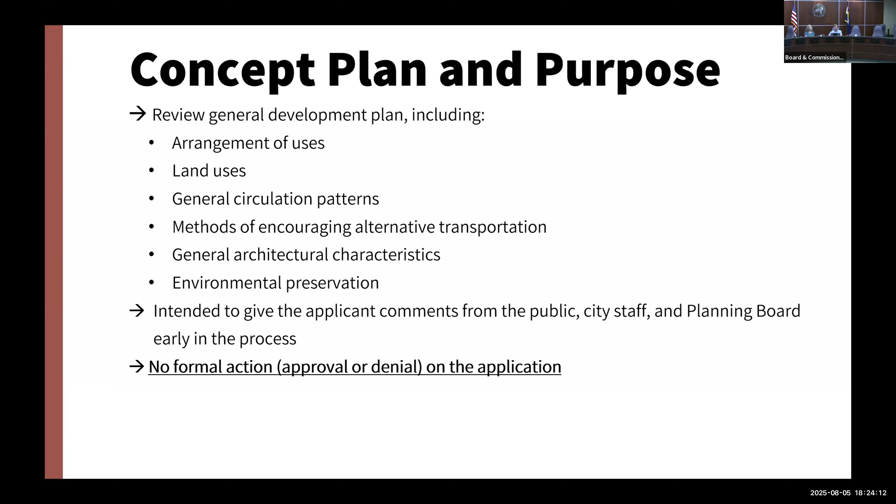Good evening, everyone. My name is Allison Blaine, and I am the case manager presenting this next item. In this presentation, I will briefly cover the information that was provided in staff's memo, including the purpose and process of concept plan, the project proposal and background, and some key issues for discussion. The purpose of concept plan is to review a general development plan for a specific site and help identify key issues in advance of any site review submittal. The applicant will receive comments from the board, staff, and public, and as a reminder, no formal action will be taken tonight. The applicant completed the necessary public notice requirements per the code. Written notice was sent to property owners within 600 feet and a sign was placed on the property as well. Staff received comments from 3 neighbors, which have been included in the memo packet.

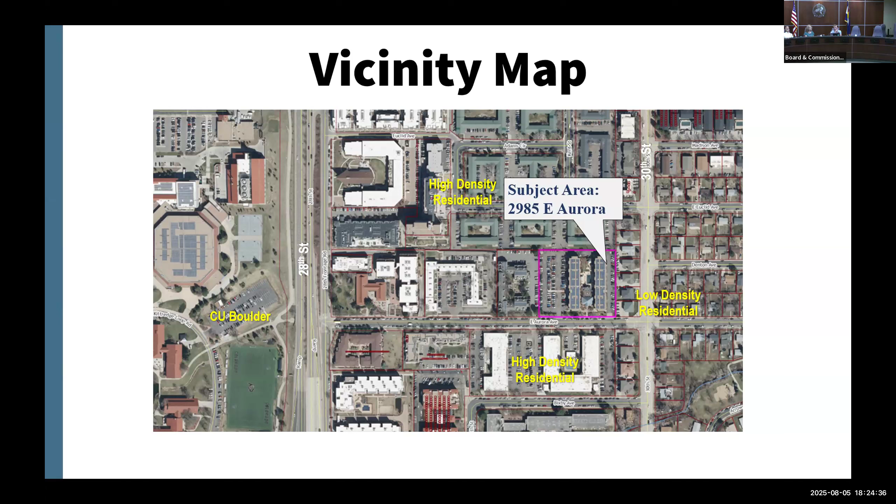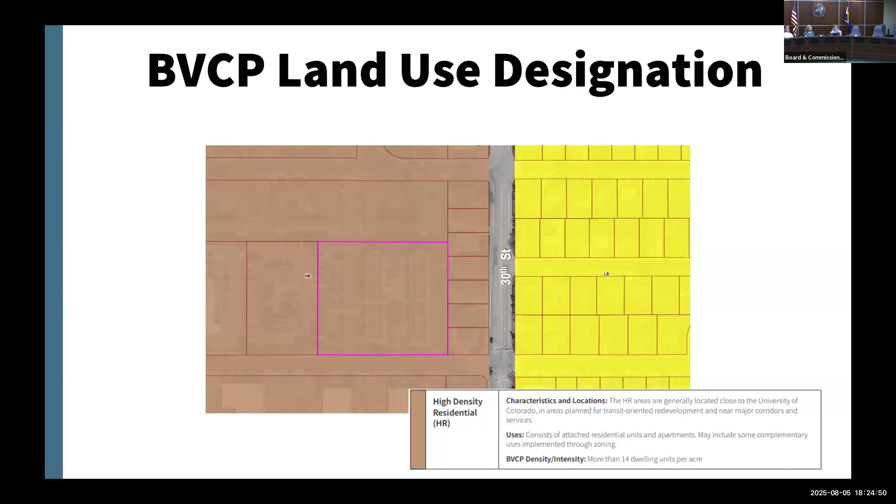The subject site is located east of CU Boulder between 28th Street and 30th Street along East Aurora Ave. The land use designation for the site is HR, or high density residential. These uses consist of attached residential units and apartments and may include some complementary land uses. The anticipated density is more than 14 dwelling units per acre. The subject site is zoned RH5 and surrounded by RH5 zones on all sides. East of 30th Street, the zoning transitions to RL1. Intensity standards for the zone are based on the combination of the following: an FAR limitation of up to 1.5, the provision of a minimum of 15% of usable open space, and the application of height and setback standards. Per Table 7.1 of the Land Use Code, buildings are limited to a max height of 35 feet by right in the RH5 zone.

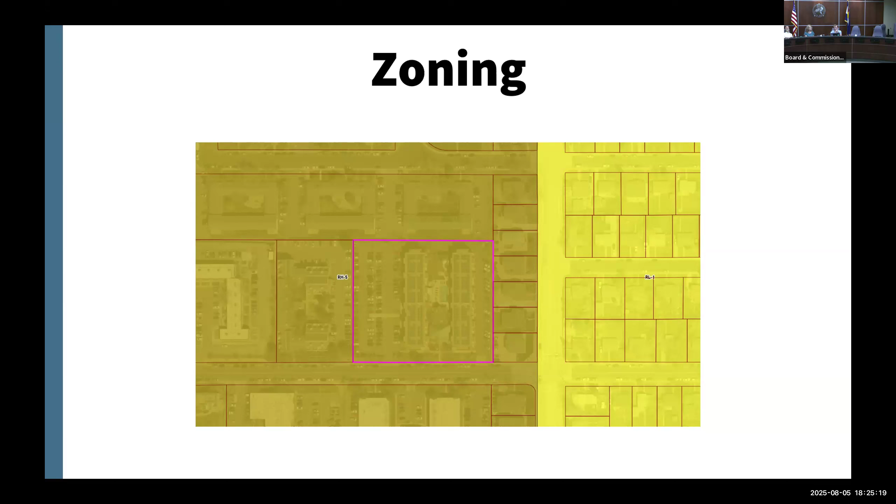The area is predominantly residential, and the uses immediately surrounding the subject site are high-density residential, with the university campus to the west and lower-density residential to the east. Commercial uses are located south along Baseline Road and north along Arapahoe Ave.

There's a variety of building forms and heights in the area. For instance, the existing Sterling Apartments on site is 4 stories, and 2-story quadplexes and triplexes are located east of the subject site along 30th Street. Development closer to 28th Street, such as the Spanish Towers and Golden West, are over 5 stories. Building forms scale down mostly to single story to the east of 30th Street.

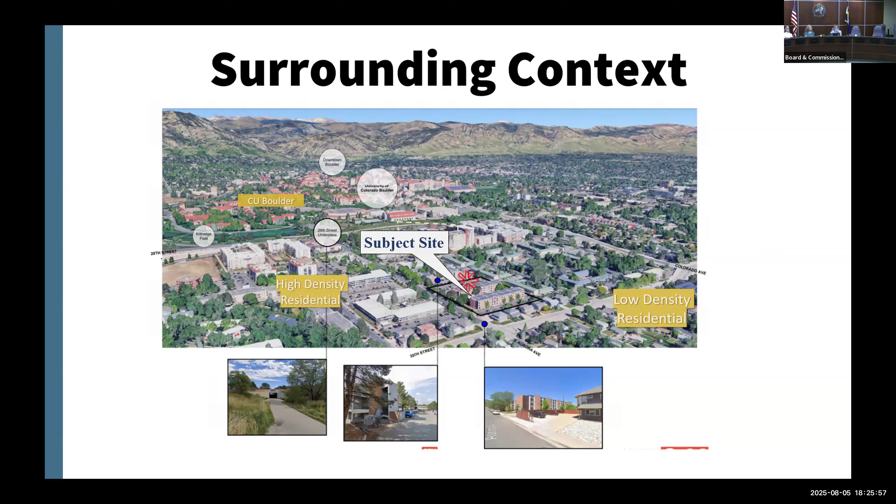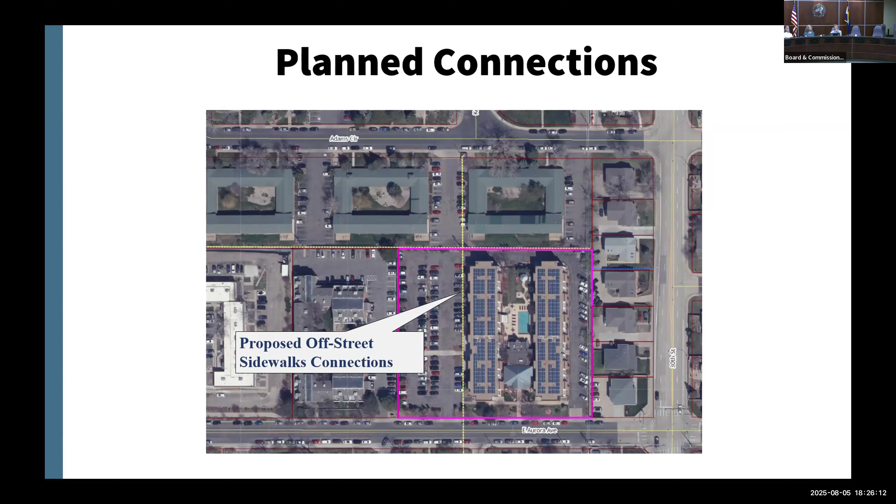The city's transportation master plan shows a sidewalk connection along the northern property running east-west, as well as bisecting through the site running north-south. Construction of the sidewalk will be required and should be shown on all plans and documents as part of a future submittal. The site is already developed with attached residential for the Sterling Apartments, a surface parking lot, and some vegetation and landscaping along the edges of the property.

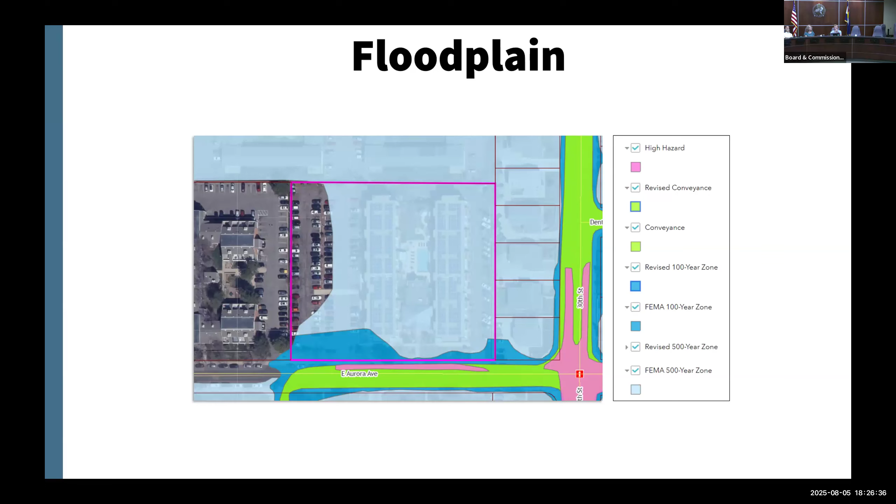The site is near Skunk Creek and is therefore impacted by the 500-year and 100-year flood zone. Proposed redevelopment of the site will require floodplain permitting and additional design considerations. And that brings us to the proposed project for tonight. The applicant is proposing to subdivide the existing site and redevelop the western portion, currently a surface parking lot, with a new residential building containing 36 dwelling units and up to 55 feet in height.

Parking is proposed to be located in a below-grade garage, as well as some surface parking east of the new building. As submitted as part of this concept plan, a majority of the open space will be provided in the form of private balconies and rooftop decks. A cafe/amenity space is shown on the ground floor along Aurora Ave, and the roof heights vary from 2 to 5 stories. The design also incorporates facade recessions and projections in the form of bays of different materials. Simple details include awnings, parapet caps, and brick detailing, and the facades provide a repeating stoop element.

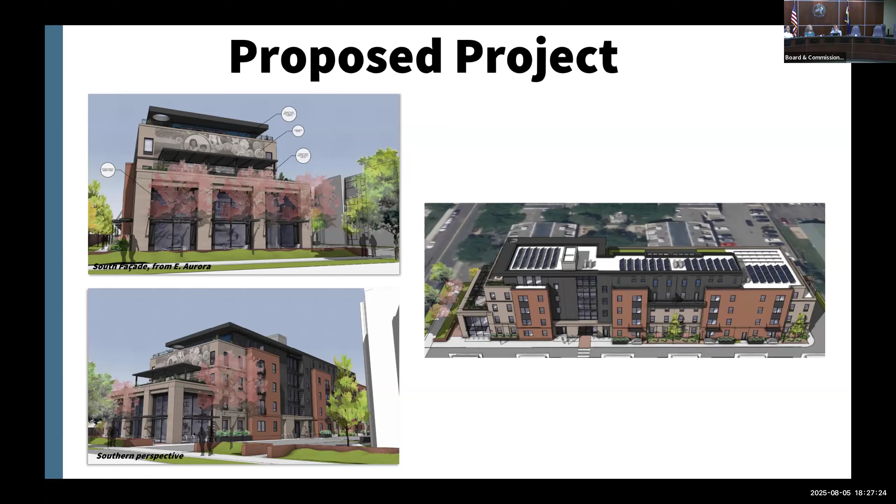Staff has identified 2 key issues for discussion, and I'll detail these in the next slides. Key issue 1: is the proposal consistent with policies of the BVCP? Staff finds that overall the proposed use and design for the site aligns with key BVCP policies and the land use designation for the area by providing housing in an area that is active, near transit, and close to CU Boulder. Key issue 2: does the Planning Board have feedback on the conceptual site plan and building design?

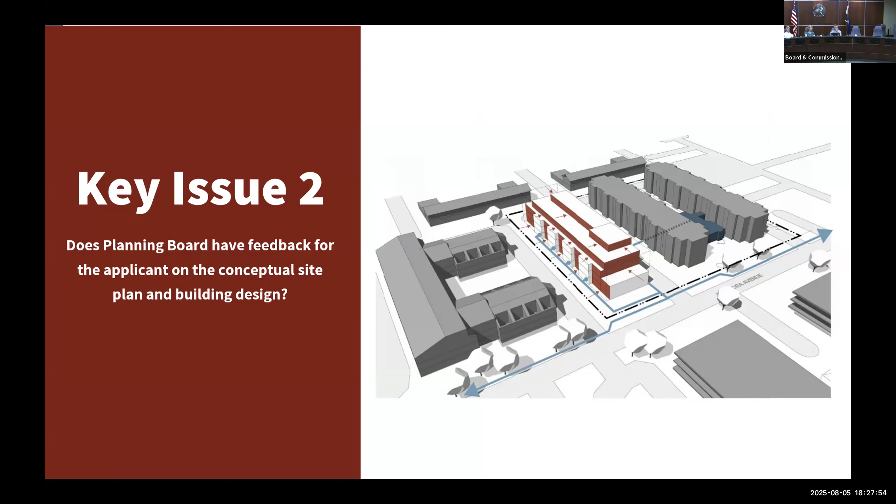Overall, staff supports the general design, including the building form and site layout, and finds it generally consistent with several site review criteria. For instance, the larger floor plate building incorporates varying roof heights and forms to provide relief to the proposed height and mass, consistent with criteria. Facade projections and recessions add additional variety to building form, and design elements like high levels of transparency along the southern elevation create an anchor to the building form as well as a vibrant pedestrian experience. Staff supports the inclusion of simple detailing, material assignment to building forms, and lack of in-plane material changes.

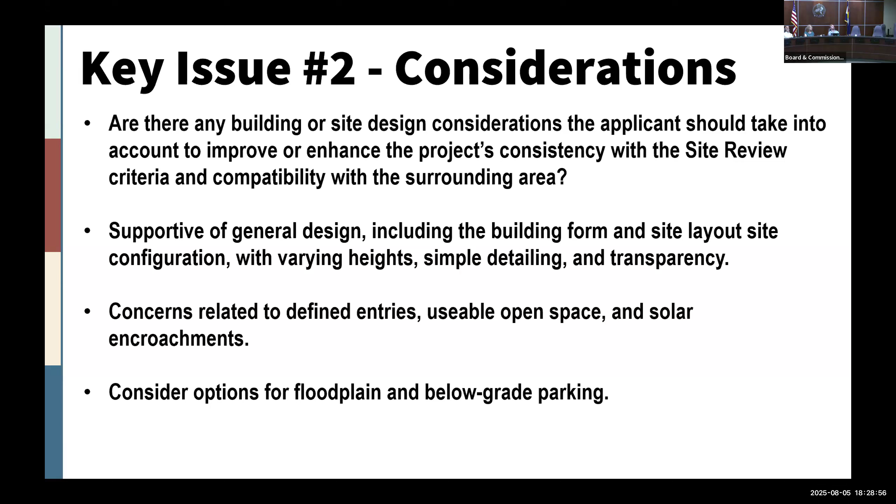There are some specific concerns about usable open space for the site, which is predominantly private balconies and roof decks, as there's limited ground floor public gathering areas. Additionally, a defined entry should be included along the southern elevation to align with criteria, and staff recommends the applicant better review the design as it relates to solar encroachments on adjacent properties. And then last, the applicant will need to consider some design options for the below-grade garage, which is currently not allowed in the flood zone as proposed.

For next steps, following the concept review hearing, City Council can vote to call up the item to provide additional feedback. After that, the applicant will then either proceed with submitting development review applications or can submit a second concept review application. As currently proposed, a site review application will require a decision by Planning Board, subject to call up by City Council due to the proposed height. And I will now open it up to questions.

Thank you so much, Allison. Always a very informative presentation and speedily done, which we appreciate. Thank you. Okay, questions from the board for Allison. Kurt.

Thank you. Yeah, I have a couple questions to start off. One is follow up really on the question that Laura asked by email about the flood plain, flood development, and particularly with respect to the garage. In your presentation, you said something about evaluate options or something like that. Can you elaborate a little more on what options are available other than not doing that?

Yeah, one of the options as it's described in, I believe, I don't know the exact code reference, but if they were to change the uses and include some commercial or mixed use, I think it's up to 25%, then the garage may remain. And the applicant's also here who can answer the same question when they present. Okay, that's interesting. Good to know.

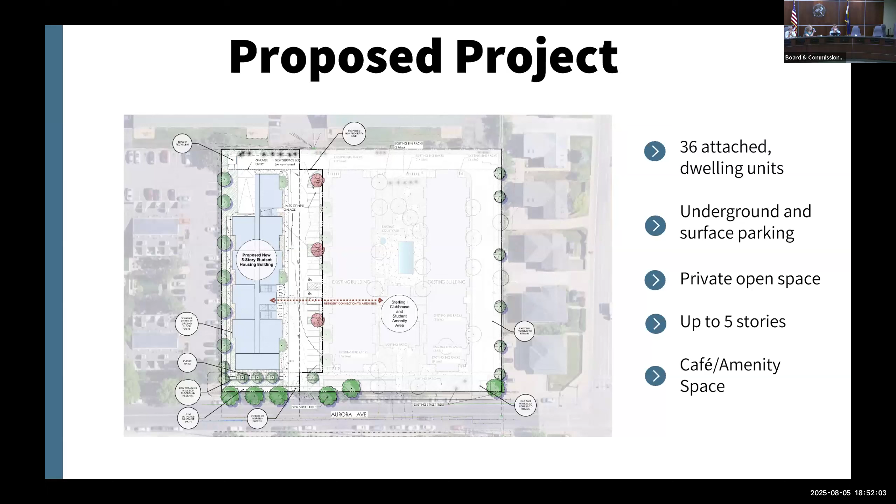We have base flood elevations that are specified in our code, but the overarching policy of why residential and mixed use are treated differently, I think Don can explain. Okay. It is also in the code, but it sounds like that really comes from the FEMA rules. Right. Okay, got it. Thanks.

Any last questions from the board for staff before we go to the applicant presentation, and then our public hearing after the board asks questions of the applicant? Okay, seeing none, we will go to our applicant presentation. And I believe the applicant will have 15 minutes, if we can put that up on the clock for them.

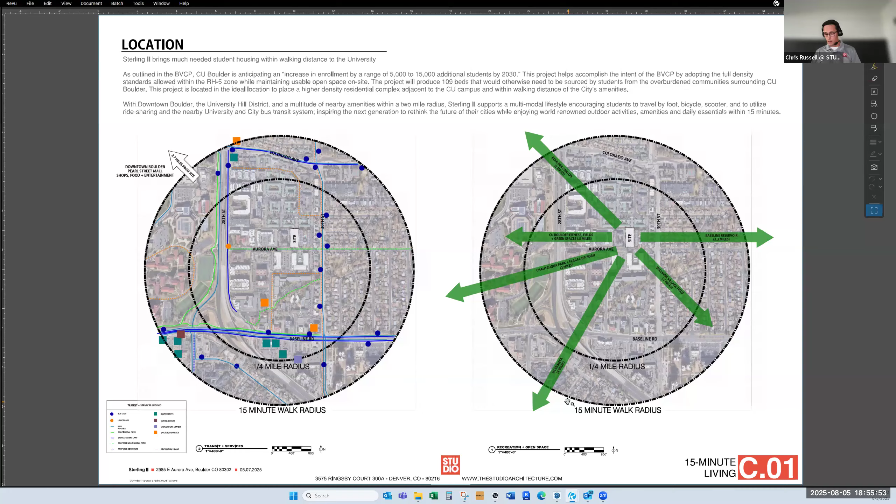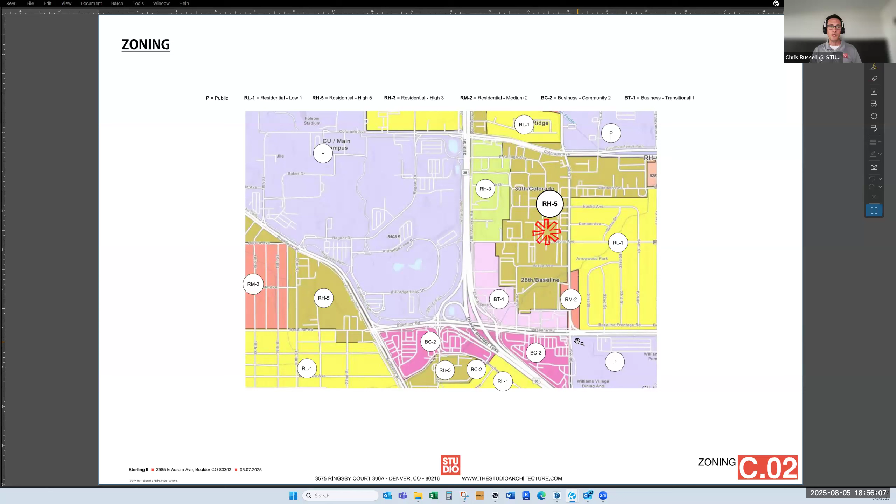Student housing, we feel, is the best use for this site, as it supports the purpose of the RH-5 zone that it's smack dab in the middle of, and the vision of the university subcommunity, which is to support growth of the university by 2030. Again, Allison already showed this, but RH-5, just east of the university and Highway 36. Allison talked about the goal for RH-5 to support that density for more residential units.

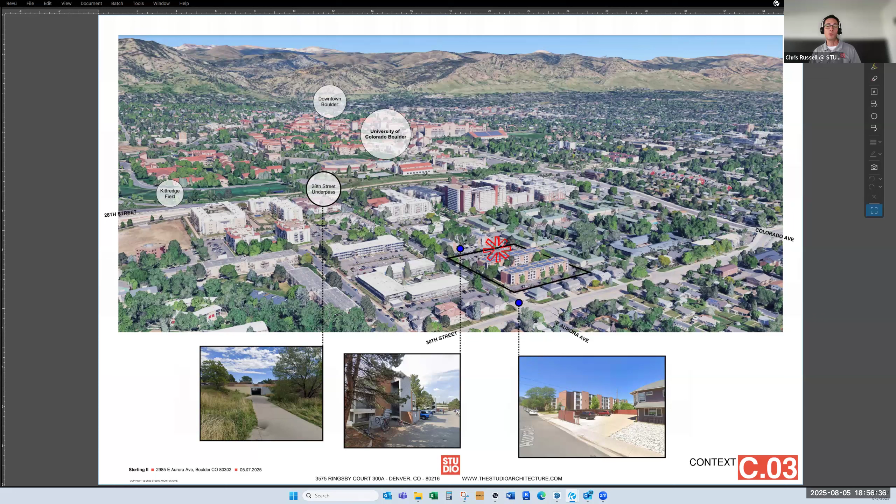This is a good aerial, I think, that shows the surroundings of the site. There's 2, 3, 4, 5, and even a 10-plus story building to the west. So we're proposing to take advantage of the allowable modification in the code to elevate the building to 5 stories and a maximum of 55 feet. It feels appropriate in this location in order to provide some much needed housing. So what are we proposing to do? Diagram 1, like I said before, initially subdivide this site into 2 separate sites.

They're both going to be compliant lots, one serving the existing Sterling apartments and one serving our proposed new construction. We're going to relocate the 100-year floodplain closer to the south property line. And both of these, as Allison noted, will happen concurrent with the land use review application.

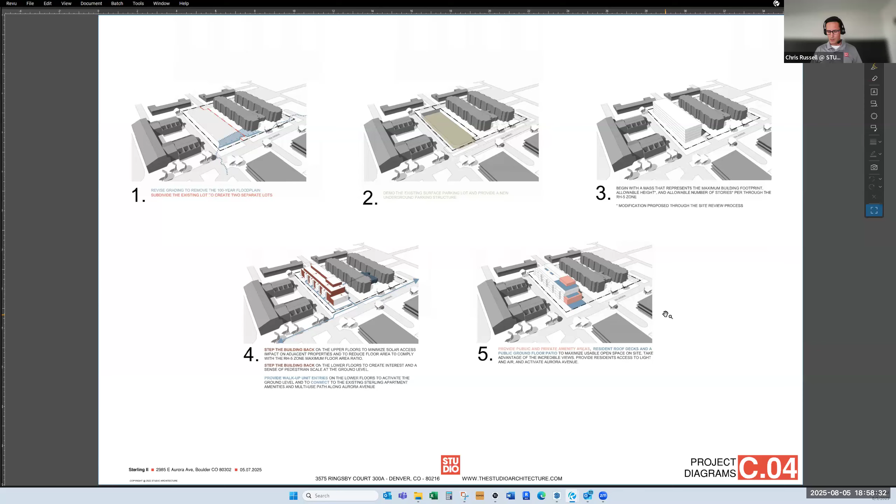Major moves here. This is probably where the bulk of our questions will be asked and answered. So the major moves of the project as it regards circulation and the location of the mass and the program. First, the surface of the new lot is split essentially in half, with the east half for vehicular circulation and surface parking, and the west half for the building and open space. The below grade parking would bridge the two and span from the east to the west property line.

On the surface, on the east half, the two-way access off Aurora Ave is maintained and accesses the 21 new surface parking spaces there on the east property line, and then continues north and accesses the parking garage and trash enclosure on the northwest corner. I know there was a question about how the parking garage is accessed. So you'd access it kind of in a counterclockwise fashion around the back of the building there.

The one-way circulation going clockwise around the existing buildings would be maintained. And then on that east side, there are actually 25 existing spaces that would remain. And all of this parking on the existing site and the new site would be available for all tenants of Sterling 1 and what we're calling Sterling 2. So there would be a shared parking agreement there.

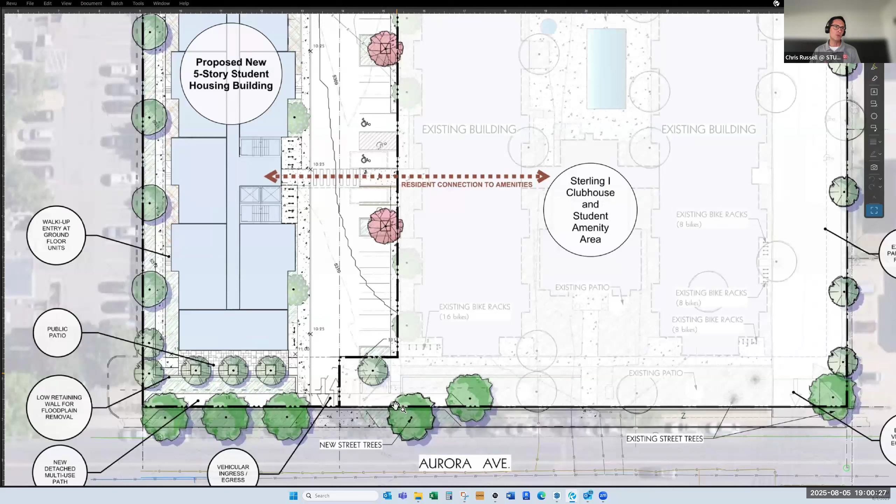The pedestrian circulation, we talked a little bit about this. Along the south side, it would be improved. We'd provide a new detached walk there, connecting east to west along the south side. And then the north-south connection that isn't quite highlighted, and I don't know if you can see my mouse, but I'll try and zoom in here, but there is one provided going north-south. That supports the vision of the transportation master plan there that would connect to one running east and west.

And got some follow-up questions for staff about what that looks like and how to implement that east-west sidewalk and how the properties share that. Let's see. The other thing to note here is that a strong and direct connection would be provided for the residents of the existing building and the new building, again, to share those amenities. I know you guys had a question about that.

It's not just the landscape and open space on this side, but the advantage of the same owners for each parcel would be that they can access this quite generous pool deck, fitness area, outdoor pool; it's quite a generous amenity space here on the existing site. There is a door that's not shown here, but it's shown on the very tiny first floor plan on the next slide, that would access this retail space. I know it's not the main tenant or resident access, but there is a main public entrance just about centered on this retail space.

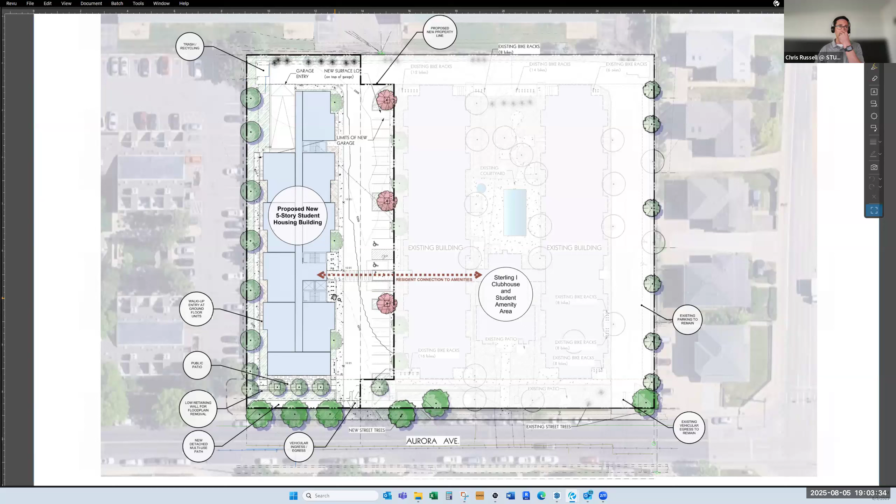So going right to left will kind of take us out of the ground first. Below grade, here is the access to the parking structure. And as Allison noted, there is a conflict here. I'm still not sure if you can see my mouse, but I'm trying to trace where the existing floodplain is. So one of the options is just to essentially shorten this parking garage and lose about 18 spaces there and try and recover those elsewhere. But that's one of the options we're looking at.

But also in the parking garage is the long-term bike parking area. Again, we're going to propose to go well above and beyond the code required long-term bike parking for this project. And also there's a spot here for additional tenant storage in the form of 3x4, 3x3 lockers there. On the ground floor, we talked a little bit about this. It contains mostly residential units with an amenity space on the south side. And then you can really start to see how large that public patio is on the south side.

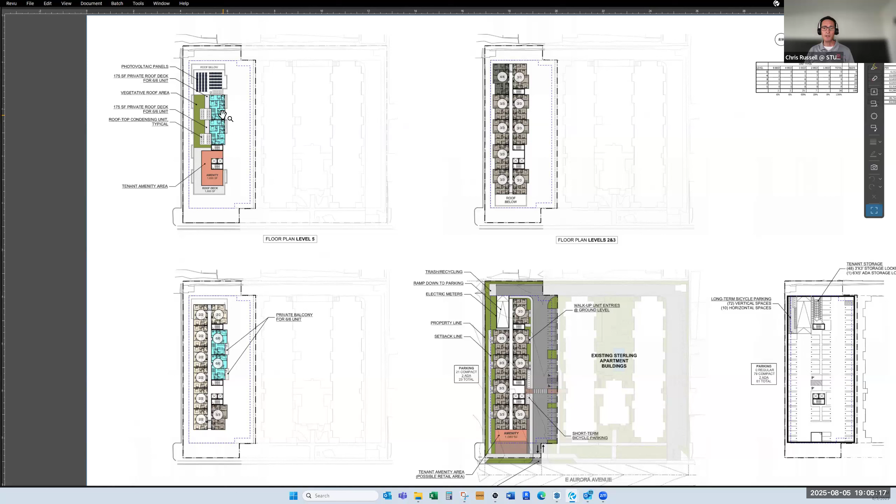Upper floors, I'll zoom around a little bit, contain residential units, private balconies for the 6-bedroom units that you can see here. And we can see those on the elevations in just a moment. Roof decks for resident enjoyment, and a large amenity space on the 5th floor here on the south side with incredible views of the Front Range, as you can imagine. On the roof, we're stepping back the massing significantly and proposing a lot of usable roof deck area, a vegetative roof area, and the remainder would be clear area for a future PV system.

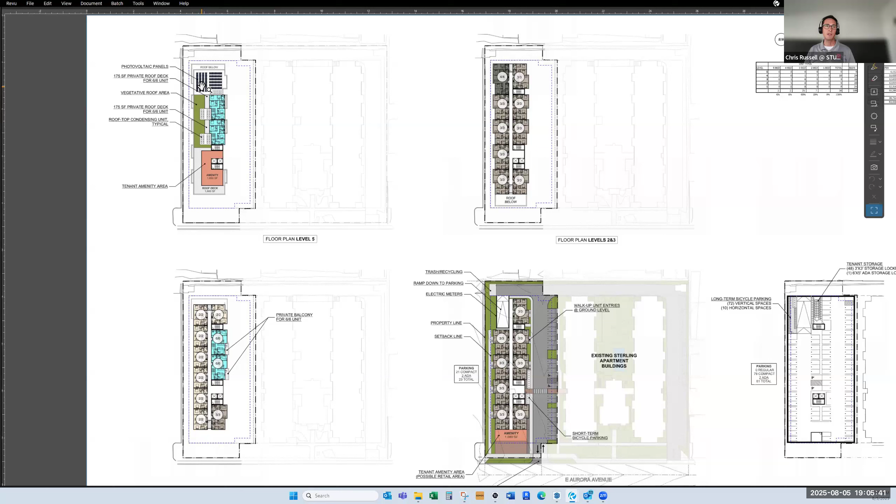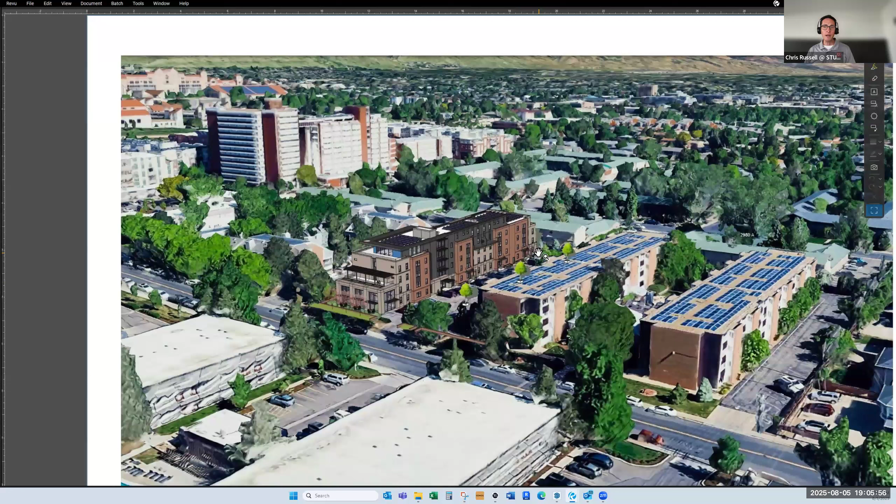I know I'm running short on time here, so I'll try and go quickly here. Here's an aerial just showing the consistency of the massing, color, and materials with the surrounding context. It highlights the stepping of the mass from Aurora Avenue up to the 5th floor that Allison talked about. Here we are floating above the existing Sterling apartments. This highlights the amount of permanent materials being used, 2 colors of brick, the tan, the red, the dark color being fiber cement panels.

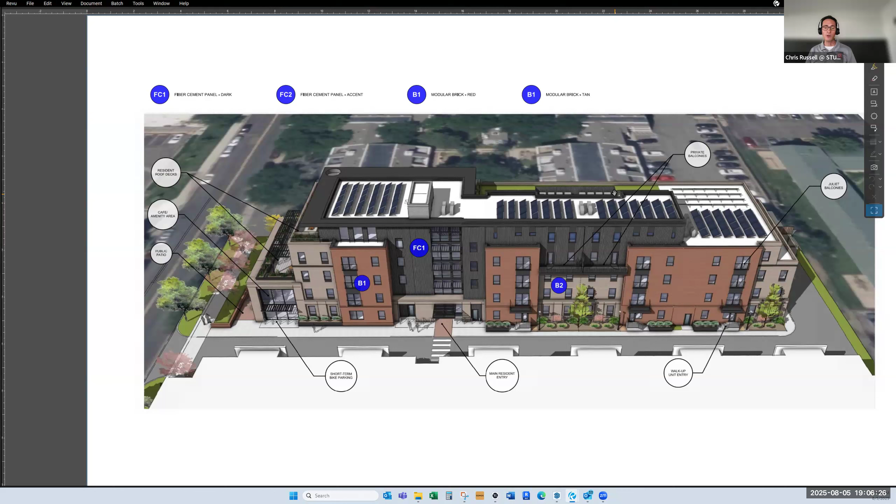This also highlights the stepping again of the mass along the front and the rear of the building and how it kind of crescendos up to the amenity space on the 5th floor. You can see the private stoop entrances along the ground floor and the main resident entry here that connects to the existing Sterling apartments.

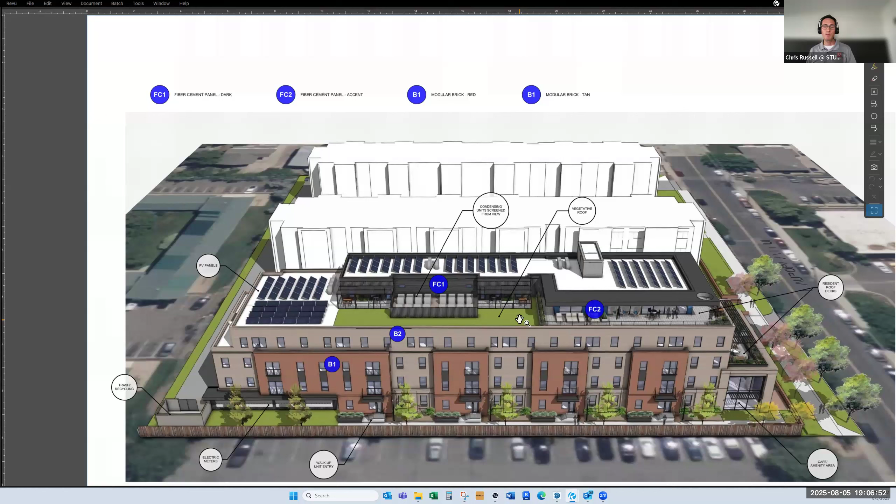Flipping around to the other side, if we were looking from Flatirons here from the Front Range, highlighting the attention paid to the upper roof and how to best utilize that space for resident enjoyment, using the vegetative roof not only to beautify the space, but also to reduce cooling loads of the building, and using the remaining available space for the PV system.

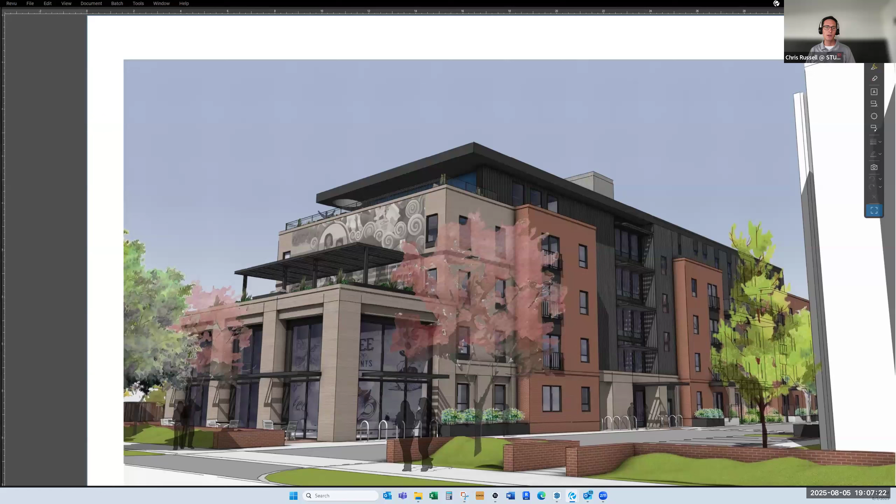This is from Aurora looking southeast at the southeast corner. The variation along the mass along Aurora and the transparency of that two-story amenity space. You can't quite see it there, but there would be a door here in the center. It would activate and really create permeability into the site with this two-story mass. Sorry. Again, just showing this, there would be doors here. I think I might have it on this side, but there would be doors accessing this from the south spot.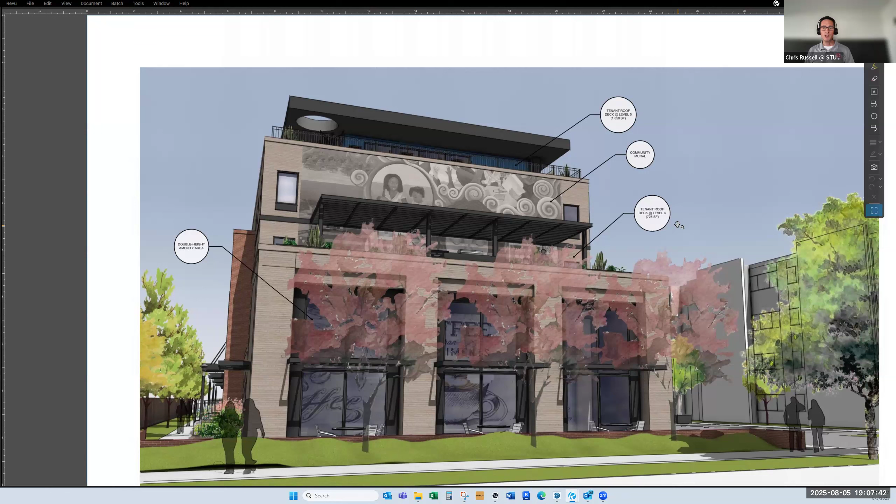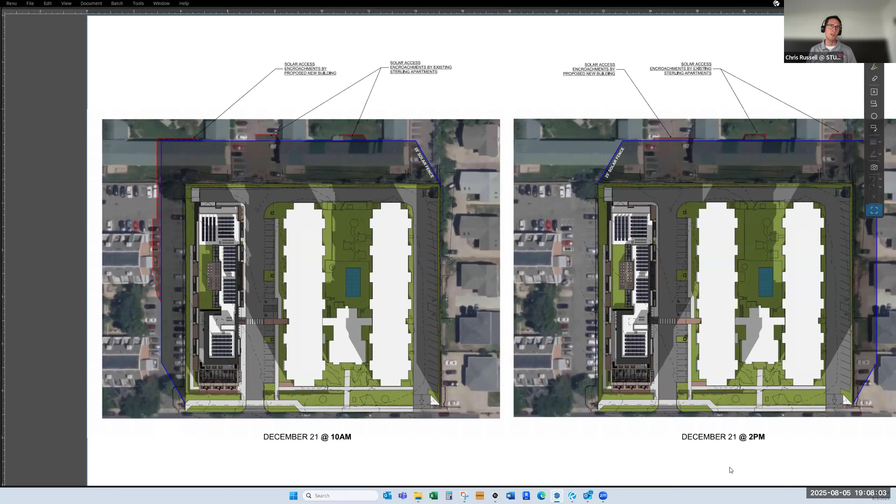This perspective shows the same two-story space along Aurora and the potential for a local artist to create a mural to provide some interest along the street and within the neighborhood, just as an additional amenity space there. And as we talk about solar access with 7 seconds left, this is shaded to where the extent would happen. And I will try to answer a quick question about how that affects the north roofs. As you can see at 10 a.m., it actually will hit the building, but will save the roof free of shadows from our project.

So I know I'm over time. Thank you guys, and really looking forward to this conversation continuing and answering to the best of my ability any questions that you guys have. And we have Dash in the chambers to answer anything civil.

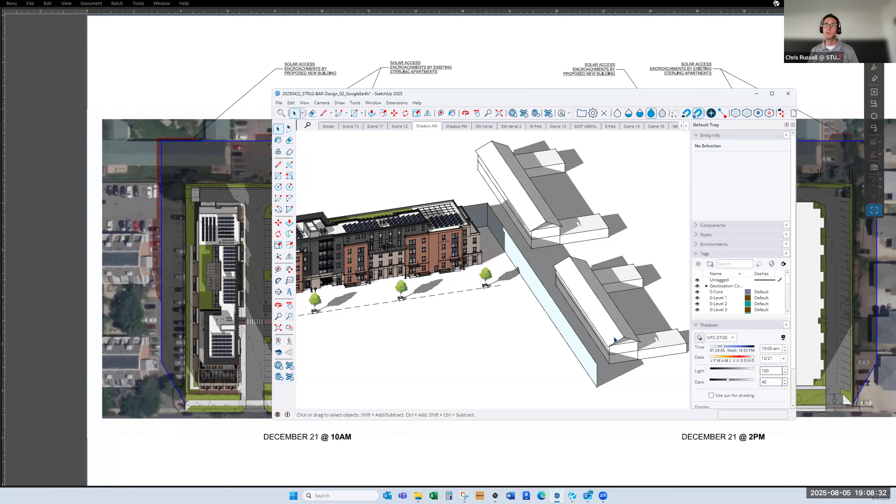Thank you, Chris. And just for the board's information, so that board members can ask a question if they would so choose, is there anything that you meant to cover in your presentation that you did not get to? Any topics that we might want to inquire about? My presentation? Yes. No, I think we covered it all. I'd love to answer the bed-bath ratio, the additional bike parking. I think we went over the shared amenities between the two sites there. I think we covered most of it.

Okay. All right. Well, I'm going to turn it over to my fellow board members to ask questions and follow up on anything that they don't feel has yet been answered or new questions that they have. So who's got questions for the applicant? Who's ready to go? Okay, we'll start with ML. Thank you, Laura, and thank you, Chris, for the presentation. I have a number of questions. So yeah, we can start with what you pointed out as far as the bedrooms and bathrooms.

Your attachment A proposed plans has a chart that I was curious about, and I'm not sure if it's incomplete or it's incorrect. Anyway, it says unit type, number of beds, number of baths. I think it only shows unit types, but it shows 0 units on the 5th level. So I'm curious if it's just a contradiction. This wasn't completed, or do you know which chart I'm talking about? I do, and those are pretty unique units there. So the ones highlighted in blue, the ones that you're talking about.

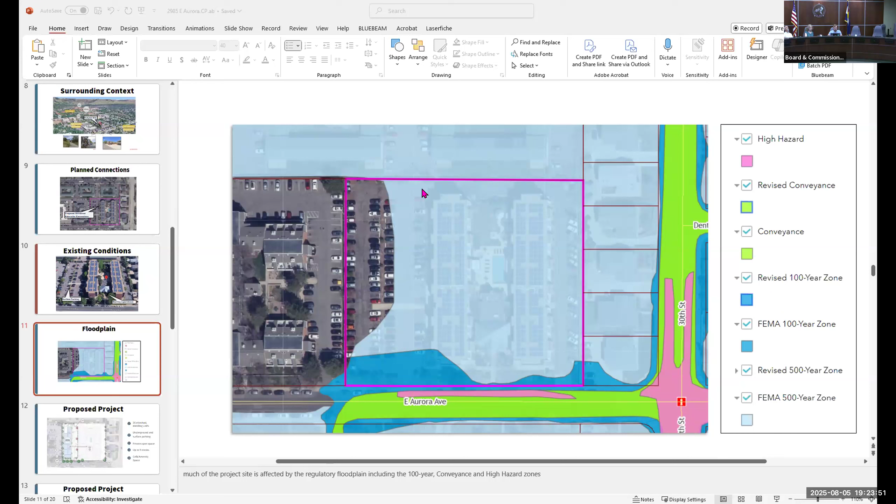Mark, you may be muted. We're not hearing you. Okay, great, thank you.

And it might be good to have Mr. Ash stay up, since this whole flood garage thing is both fascinating, complex, and kind of frustrating. First question is, I assume that you are having unbundled paid parking, given the small supply of parking in relation to the number of residents. So first of all, you have unbundled the parking, yes? Chris can answer that. I think it'll be unbundled, yes. Okay.

And I'm not looking for loopholes here, but does a paid parking garage count as a business and towards mixed use? That's challenging. I would say no, because it's ancillary to the residential units at that point. Like Charles was saying earlier, we could have amenity space on the first floor, like the coffee shop, but that wouldn't count towards the commercial space, which would be required for a FEMA mixed use structure. Okay. Thank you. I'm gonna just try to be quick here and move through these quickly.

Board members, on your marks, get ready. So do we have feedback on the conceptual site plan and building design? And do we have thoughts about consistency with BVCP policies? Those are our two key questions for the evening. Who would like to go first?

Okay, so I'm seeing ML and then Mark. Mark, did you want to jump first or are you good? Oops. I think Mark is deferring to you, ML. Go right ahead. Okay, perfect. My screen is frozen, but you guys can hear me? Yes, we can hear you.

Okay, so my thoughts about the BVCP, and thank you, Allison, for doing some research for me. As we've seen with the city currently, we're concerned with water and water use. And so one of the concerns that I will bring to this project is 109 bathrooms to go to these 109 bedrooms, and the compliance with BVCP. In Allison's research, there were 4 specific policies that she identified. I'm sure that there are more: 3.13, 3.26, 3.27, and 5.12.

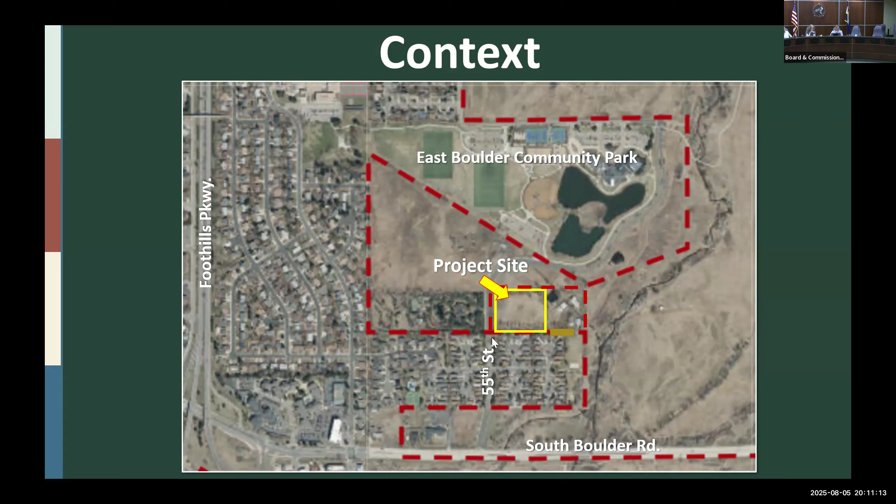So a bit about context, and you guys are probably still fairly familiar with this. This came just about 2 years ago, I guess. So the site's approximately 5.3 acres in size and is located on the east side of 55th Street, north of South Boulder Road, and south of the East Boulder Community Park / Rec Center. Surrounding single-family residential neighborhoods are Greenbelt Meadows adjacent to the south and Keewaydin Meadows to the northwest. City-owned open space lies adjacent to the site to the north and east. This is just another aerial photo showing the site's location.

So in terms of site characteristics, it's important to note the site sits within a slight depression. So the existing grade slopes down to the north and east, such that the 6 market rate unit lots that are requesting the height modification for both the market rate units and the ADUs sit between 5 and 7 feet lower than the existing grade of the neighboring Greenbelt Meadows neighborhood to the south and to 55th Street to the west.

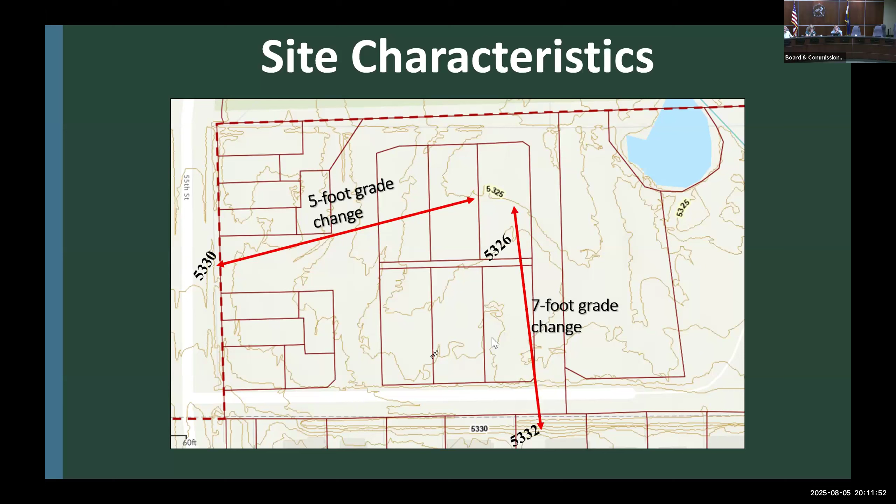So some background, on December 5th, 2023, Planning Board voted unanimously to recommend to City Council approval of the original annexation request with the initial zoning of RL2 or Residential Low 2, and with the proposed wetland mapping subject to the recommended conditions of approval at the time. Planning Board also unanimously approved the companion site review application for the property. City Council did not call up the site review application, and on February 1st, 2024, Council approved the annexation of the property.

So since the property has now been annexed, well, it was already low density residential land use designation, but I'll just go over this again. BVCP land use for the site is low density residential. Most prevalent land use designation in the city, primarily single family home neighborhoods, including historic neighborhoods and post-World War II, consist predominantly of single family detached dwelling units and at densities of 2 to 6 dwelling units per acre.

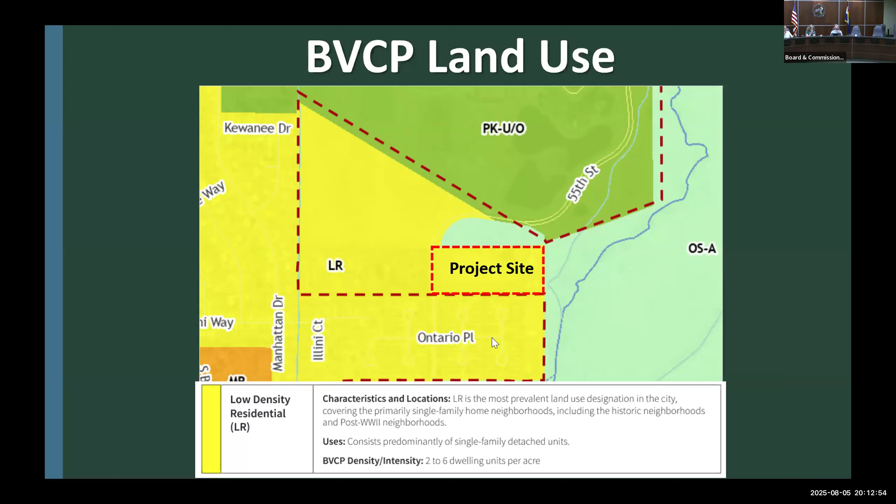The zoning that was adopted for the site at the time of annexation is RL2. This is residential low 2. This is defined in the land use code as medium density residential areas primarily used for small lot residential development, including without limitation duplexes, triplexes, or townhouses, where each unit generally has direct access at ground level.

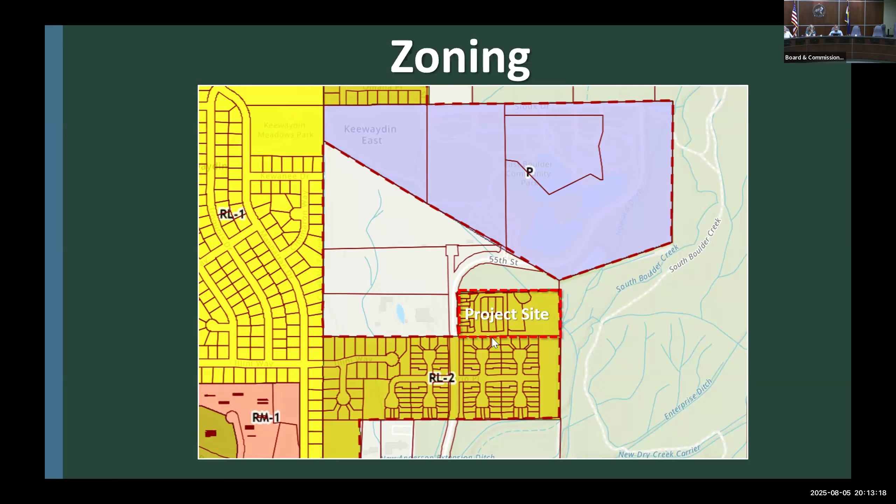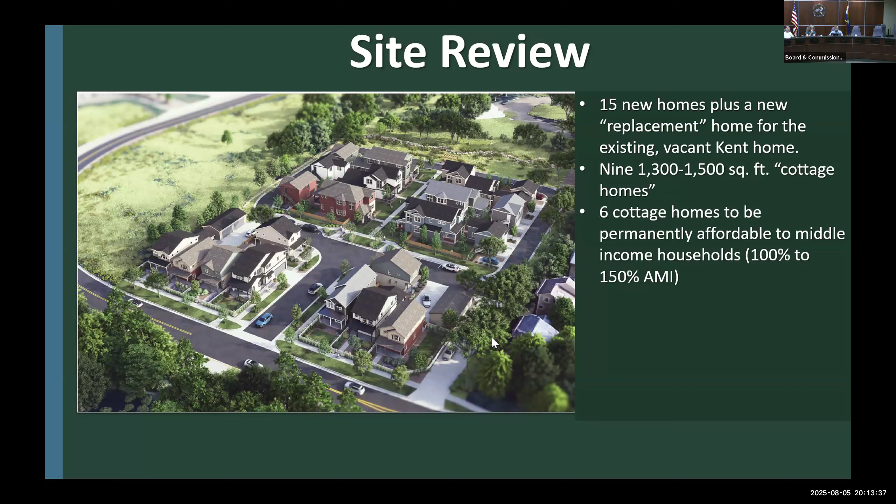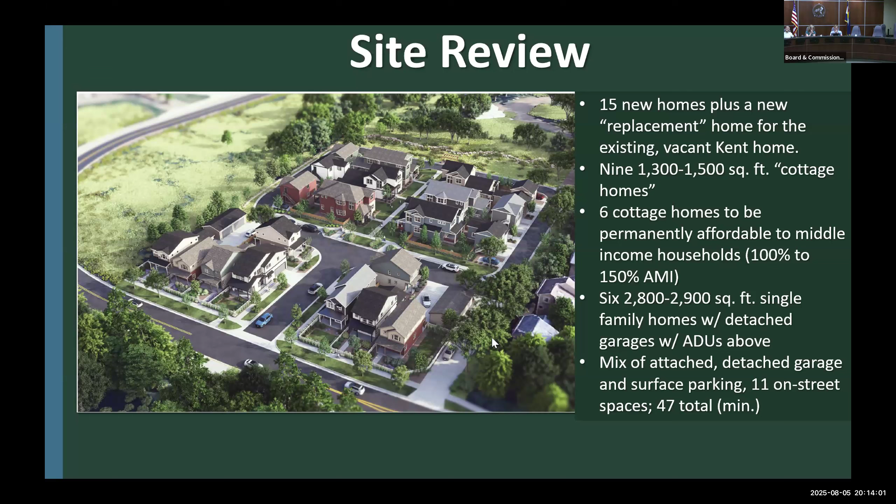I'm now going to go over the original site review quickly. So the existing site review approval included 15 new homes plus a replacement home for the existing vacant Kent home. 9 of the homes are 1,300 to 1,500 square feet. These are known as the cottage homes. 6 cottage homes are required to be permanently affordable to middle income households at 100 to 150% AMI. 6 of the homes are market rate single family homes at 2,800 to 2,900 square feet with detached garages with ADUs above, and the ADUs are required to be constructed per the annexation agreement. Mix of attached and detached garage and surface parking, 11 on-street spaces with 47 total spaces.

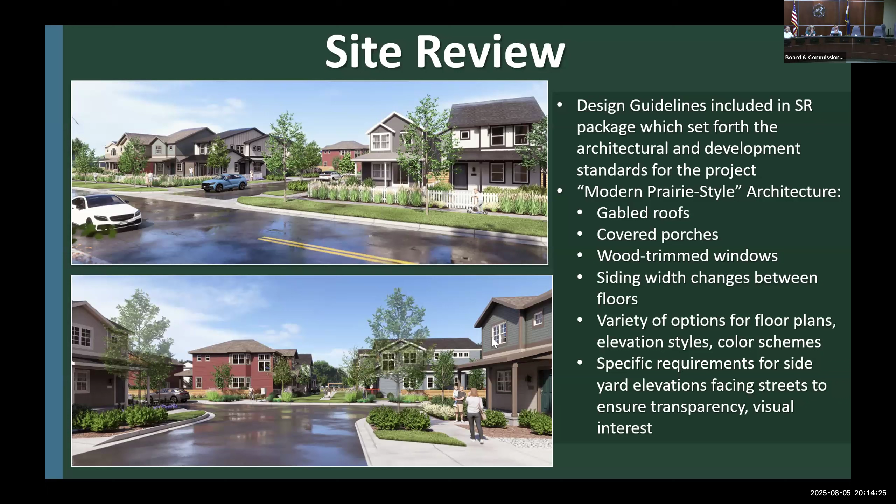The proposal included design guidelines, which set forth the architectural and development standards for the project. Modern prairie style architecture, features like gabled roofs, covered porches, wood trimmed windows, siding width changes between floors, a variety of options for floor plans and elevation styles and color schemes, specific requirements for side yard elevations facing streets to ensure transparency and visual interest.

So as part of the original annexation, we did require that 40% of the total units, or 6 units, whichever is greater, are to be permanently affordable. These are detached single family homes with a minimum floor area of 1,300 square feet. At least 2 of the units are required to have 3 beds and 2 baths. All of the other affordable units are required to have a minimum of 2 beds and 2 baths. The 2-bedroom units are deed restricted at 100 to 120% AMI, and the 3-bedroom units are at 120 to 150.

The new dwelling units, including the replacement dwelling unit, are required to be constructed on a 1-to-1 basis. This is a concurrency requirement. So basically, it's requiring that at least one affordable unit is constructed at the same time as each market rate unit.

We also, as I mentioned previously, required the construction of 6 accessory dwelling units. So every new market rate unit over 2,000 square feet in size, except for the replacement Kent home, is required to be constructed with a detached accessory dwelling unit. We also required mapping and preservation of existing wetlands on the site, and we did get significant wetland easements through the annexation as well.

So the proposed project, just a bit of background on why they're in here. So following approval of the annexation and site review, the applicant submitted final plat and final engineering tech doc review. During the tech doc review process, the extent of fill required on site increased an additional 2 to 3 feet to meet several technical requirements of utilities and storm drainage. The finished floor elevations increased roughly 3 to 3.7 feet from anticipated finished floor elevations of the site review grading plan. So the height measurement from existing grade is approximately 6 to 7 feet below that of proposed finished floor areas.

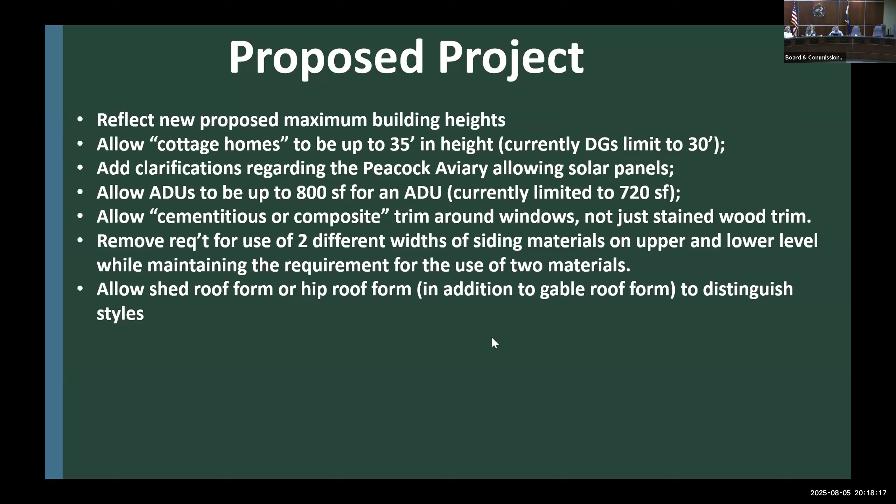Add clarifications regarding the Peacock Aviary allowing solar panels, allow ADUs to be up to 800 square feet as opposed to 720, which was originally included in the design guidelines. That's also consistent with existing by right code requirements. To allow cementitious or composite trim around windows, not just stained wood trim. To remove the requirement for the use of 2 different widths of siding material on upper and lower level while maintaining the requirement for the use of 2 materials. And just to allow additional roof forms, including shed or hip roof forms, to distinguish styles and allow for more options and elevations.

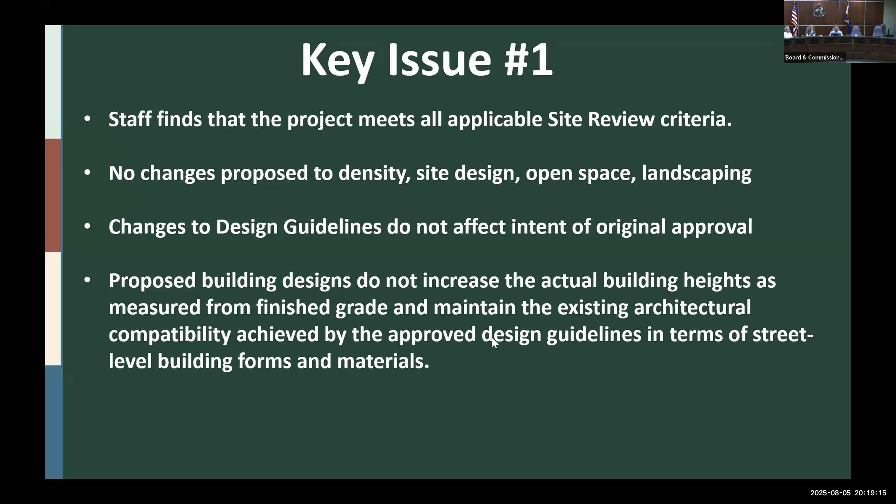So key issue 1 is whether the proposed project is consistent with the site review criteria, including additional criteria for buildings requiring height modifications. Staff finds that the project continues to meet all of the applicable site review criteria. There are no changes proposed to the previously approved density, site design, open space, landscaping. Really, the only changes proposed relate to the measurement of the building heights and then the design guideline modifications that I just listed. We found that the changes to the design guidelines do not affect the intent of the original approval and still maintain a high degree of architectural quality. Proposed building designs do not increase the actual building heights as measured from finished grade. They maintain the existing architectural compatibility achieved by the approved design guidelines in terms of street level building forms and materials.

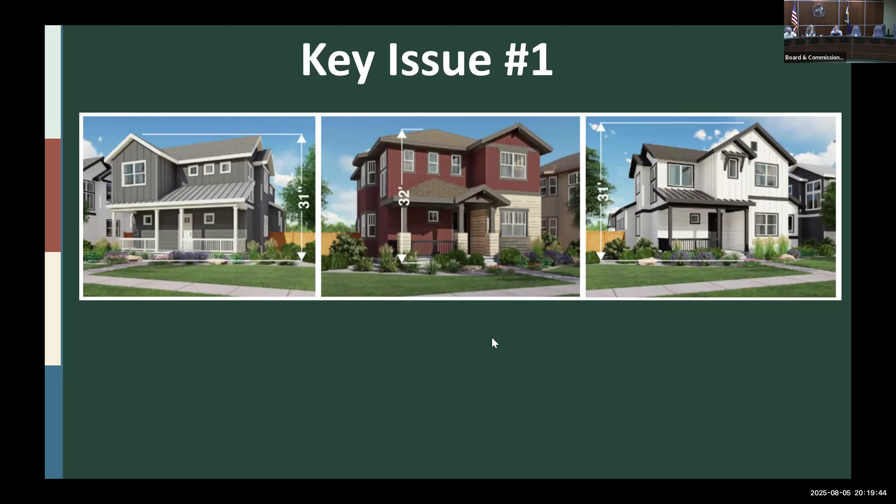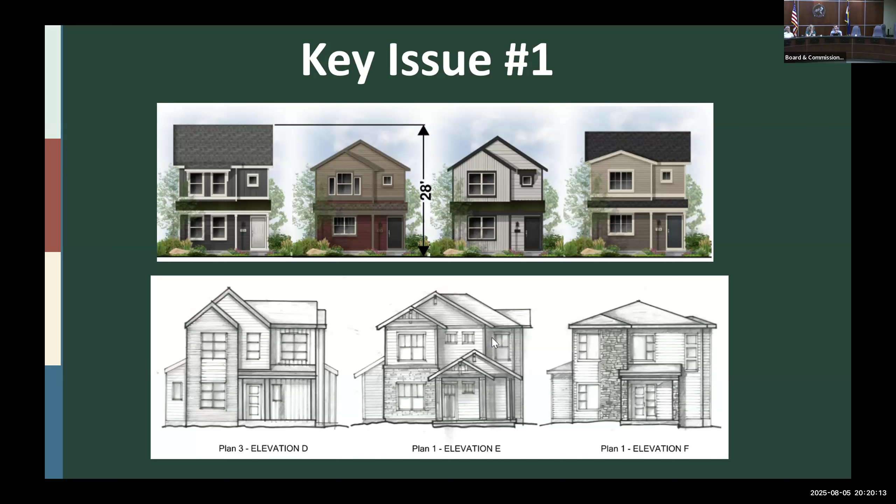This is another image showing some of the cottage homes, which as you can see here are 28-foot 2-story structures, which they're requesting to be allowed to be measured up to 35 feet. And then the images below are just some of the prototype elevations that were provided by the applicant showing some of the additional changes to the building elevations that could result from allowing the additional shed and hip roof forms as opposed to just gables.

So key issue number 2 is whether the proposed annexation agreement amendment is consistent with the Boulder Valley Comp Plan policies of annexation, as well as the intent of the original annexation terms. In this regard as well, staff found, I'll just give a reminder. So annexations with additional development potential are required to demonstrate community benefit consistent with BVCP policies in order to offset the negative impacts of additional development. The amount and types of benefits are considered as a comprehensive community benefit package through the annexation process.

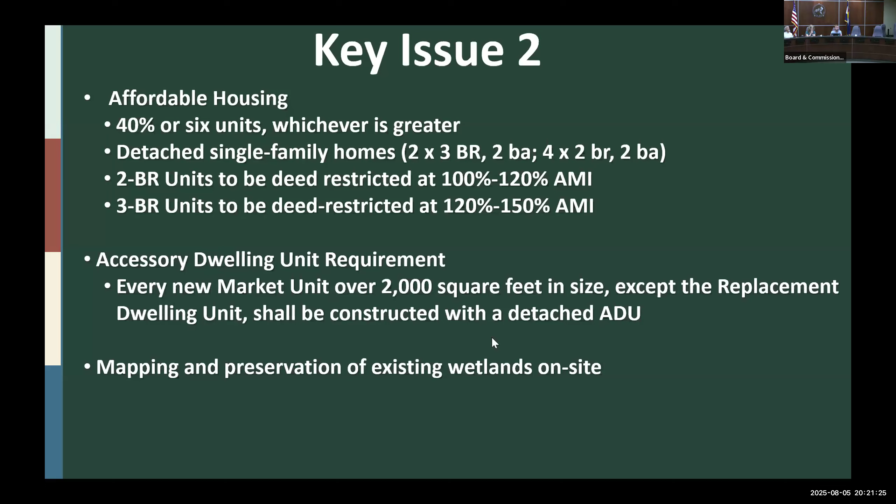And as I mentioned before, the community benefit package that we came to with the applicant, which was approved by Planning Board and Council, was the 40% or 6 units being permanently affordable. These are, again, detached single-family homes at 100 to 150% AMI, which is a range of affordability that we do not get very much in the city. So we were very happy about that. We also got the required ADUs. So we did get 6 accessory dwelling units that are required to be constructed. And then again, we got the mapping and preservation of existing wetlands on site. So overall, a fairly robust community benefit package.

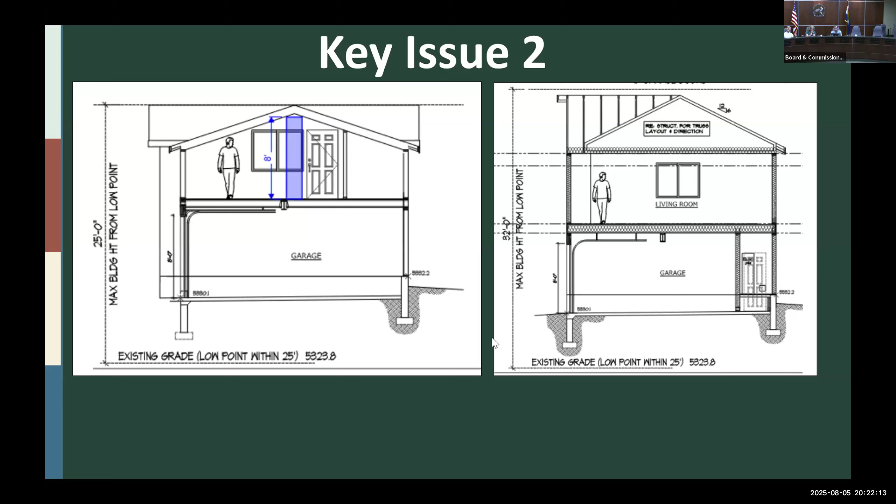So in terms of planning board action, for the site review amendment, planning staff finds that the application meets the site review criteria, and we are recommending that the planning board consider this matter and action in the form of the following motion. I do have motion language there prepared, which I can go back to. And with the annexation agreement as well, staff does find that the annexation agreement amendment remains consistent with the Boulder Valley Comp Plan policies of annexation and with the intent of the original annexation terms and the community benefit package. Therefore, we're also recommending that planning board adopt a motion to recommend approval to council, and I have the language for that as well.

So next steps, following this public hearing, City Council may vote to call the site review amendment up for a public hearing. If they do not, then planning board's decision will be final. The annexation agreement amendments are legislative action requiring a recommendation by planning board, followed by a decision by council. City Council is scheduled to consider both of these items on August 21st, 2025. And I'm happy to answer any questions.

Thank you, Chandler. Wonderful presentation as always. Questions from board members? Kurt, go right ahead. Thank you for that presentation.

I have a question about, I guess, the fundamental issue with regards to the heights. So you said that the finished floor elevation is going to be 6 to 7 feet above the existing grade, right? But some of that presumably was known in advance, right? They knew they were going to do fill, but they're having to do 2 to 3 feet of additional fill. And so really the difference from what was expected is only 2 to 3 feet, right? Not the 5 to 7 feet that is being asked for in terms of additional height. I just want to verify that really in terms of the physical facts on the ground, the change is 2 to 3 feet. Is that correct?

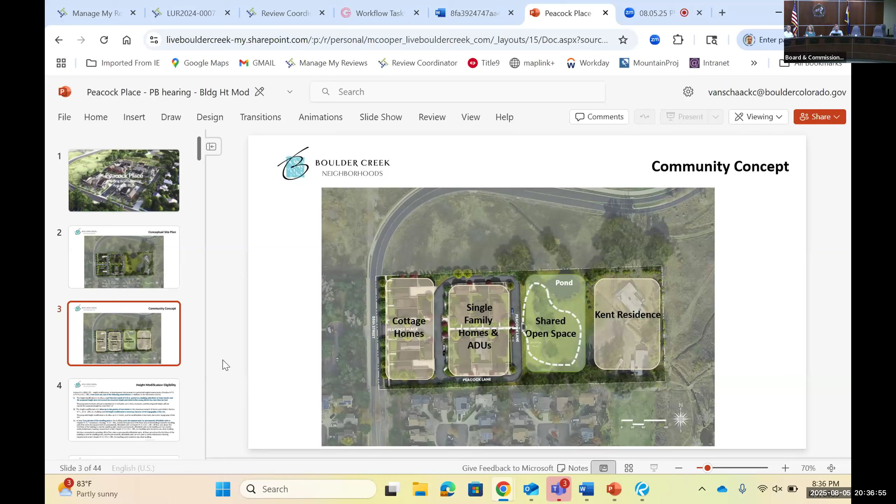You can go to the next slide. So this is just showing the overall site. If you skip to the next slide, I just wanted to highlight where we're talking about when I say the cottage homes. Those are the homes that are clustered along 55th Street on the left. The single family homes are the larger homes between 2,800 and 3,000 square feet with the detached garages and the ADUs. And then further to the east is the shared open space and the Kent residence that will be also reconstructed through this construction project.

Next slide. So looking at initially, are we eligible for the height modification? We're required to meet one of these criteria. We actually meet 3 of them. The 3 that we meet are the roof pitch is 2 to 12 or greater. And with 3 or fewer stories, the proposed height does not exceed the maximum height permitted in the zoning district by more than 10 feet. We're well below the 10 feet threshold.

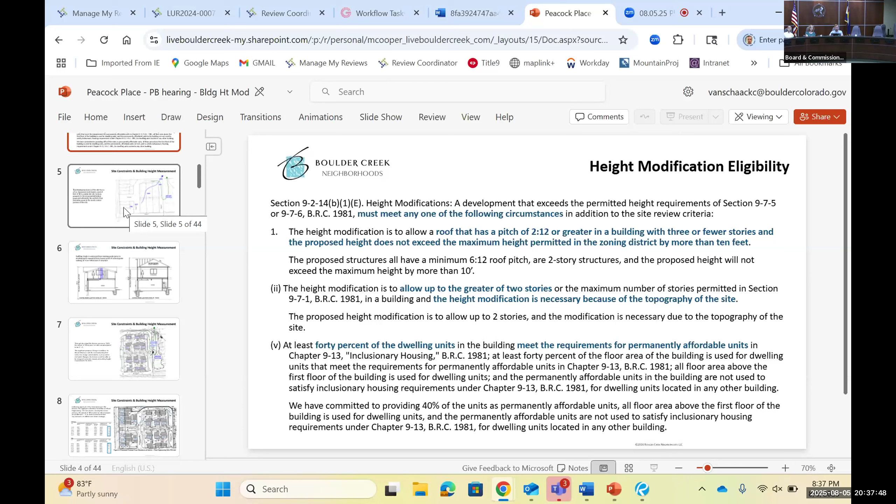The second one is to allow the greater of 2 stories. The height modification is necessary because of the topography of the site, as Chandler has mentioned, and I'll talk further about that. That is the primary reason that we're having this discussion tonight. And then third is the 40% of affordable housing, which Chandler covered. We are providing that. So we're meeting three out of the 3 criteria where 1 is required. So next slide.

We worked with the staff and the city attorney to work some language into the annexation agreement to give us a little relief on the roof pitch, and our architect worked through that and said we can probably make that work with some customized truss design and roof pitches, and maybe we compromise the living space area a little bit, but we could essentially make that work. So through this process, if you go to the next slide, Chandler.

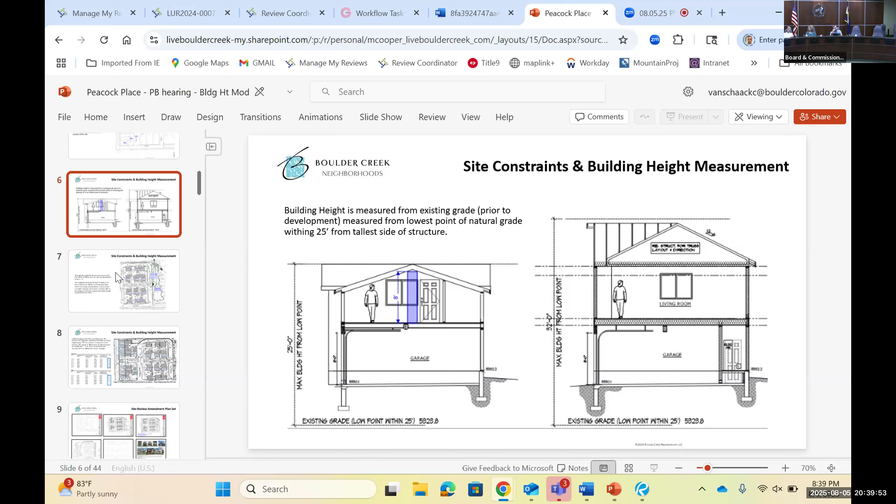So if we had to construct it to 25 feet per the annexation agreement, what's allowed in the ADU code, you can see the unit on the left, the livable area that's 8 feet and above is the blue area there. The unit on the right is showing the designed unit that we had in the design guidelines. It's a 700 to 800 square foot maximum ADU, and really there's no compromised design to the building space. Next slide.

So yeah, the site review process: one item in the package that you received was showing the delta of where we thought the homes would be sitting in terms of the finished floor elevations and how that changed in the tech doc review. We originally proposed design guidelines that we thought we could, with a few design modifications to those homes that we were depicting, such as roof pitch changes, design these ADUs per the code and per the annexation agreement. Next slide.

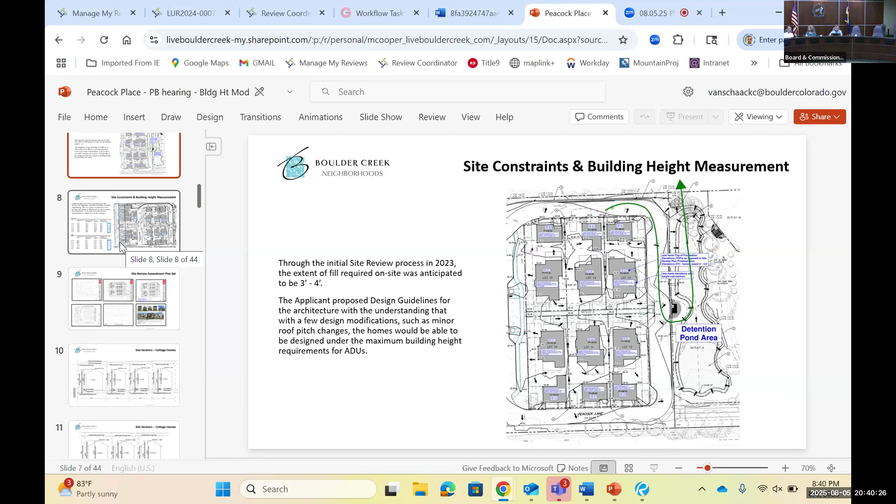And then through the tech doc review, we have our civil engineer here if you want to get in more detail about that, but basically to meet some utility requirements that were unknown during the site review process, we had to elevate almost the entire site, or the eastern portion of the site, by 2 to 3 more feet. And yes, you bring up a good point. If it went up 2 to 3 more feet, why aren't we just asking for 2 to 3 more feet? I can kind of show you why we're asking for that.

We have a little threshold in there as we go through plot plans. Elevations can change a little bit, so we don't want to design everything to the exact inch. So there is a little bit of leeway in there. And I can show you what that threshold looks like for different homes on different lots. What we want to propose is that we're not pre-planning every home; that's market driven. For the bigger homes, you could pick the home and the lot that you wanted if it met solar requirements and other criteria. I'll explain that a little more. But it's a good question, valid question for sure.

The chart that's in your packet lists all of the existing elevations, or the lowest elevation around each home. It shows what the measurement is, either 25 feet for an ADU or 35 feet for an existing home, or for a proposed home, what that elevation is, and then it shows our proposed finished floor and what we anticipate as either a 25-foot or a 31-foot home, which is approximately the heights of the homes and the ADUs, what our peak roof elevations are, and it calculates the delta.

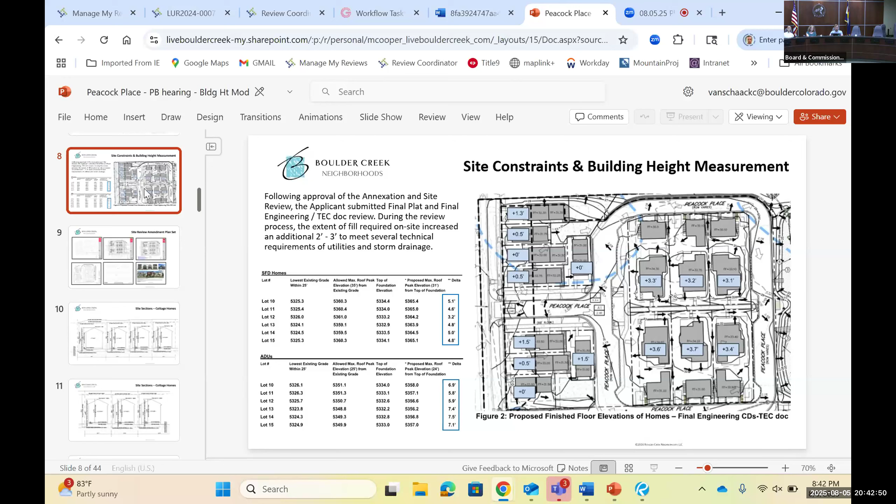The set that you have is very technical in nature, and I just wanted to walk you through the logic behind that. The first sheet on the top left shows the existing conditions of the site. The second sheet to the right shows the proposed grading plan, the elevations of the homes, and the cross sections that we drew on subsequent sheets. The next sheet shows the change from our site review to our tech doc. The fourth sheet, from our architect, shows the anticipated peak roof elevations for each home. And then all that information is put into the cross sections.

There are actually 2 sheets of cross sections. If you look in detail, you can see the different heights: 35 feet as measured from existing grade, 35 feet measured from proposed finished grade, and how far below the 40 feet we're requesting, as measured from existing grade, each of those homes would be. And if you look through those sections, you'll see that most of the homes are 2 to 3 feet below; they're not all maxed out.

The intent here is not that we are building every home 40 feet from existing grade to peak elevation. That's not what we are proposing at all. It just gives us a little flexibility and leeway in siting the homes, so that we're not getting into trouble later at plot plan and building permit review. And finally, the last sheet depicts the homes from the design guidelines, showing that the intent is not to change the heights of the homes or get any more square footage. We just want the right to build exactly what we're depicting in those design guidelines, similar traditional roof forms and architecture. We're not asking for anything additional.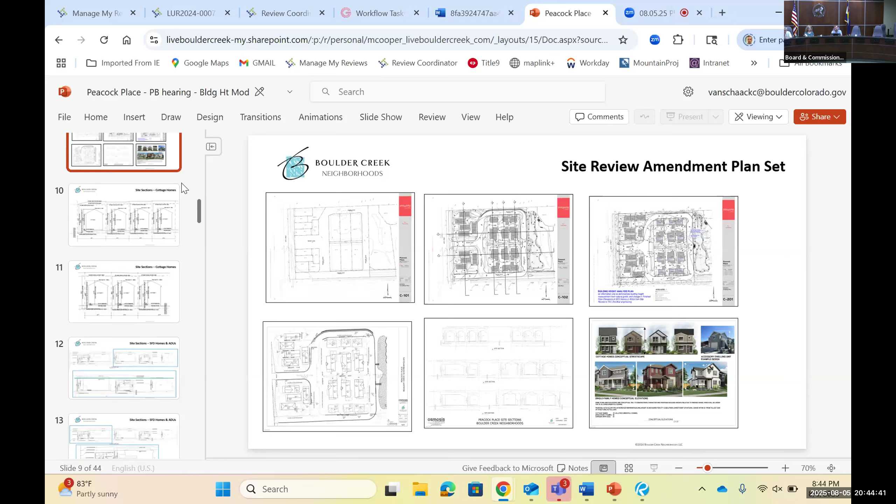And this is just showing some of the cross sections. These are the cottages. Really, as Chandler mentioned, these are not an issue. When we went through the initial process, we typically build these homes about 25, 26 feet tall. We added 5 feet and we put that into our design guidelines. I think that was a mistake on our part, knowing that there's 35 feet allowed for under RL2 zoning. So we're just asking to be allowed to go up to 35 feet.

Really, these homes are just approaching 30 feet. So we're just very close and tight. So we just need the flexibility to be able to build a little bit over 30 feet is all we really need there. You can skip ahead to this one.

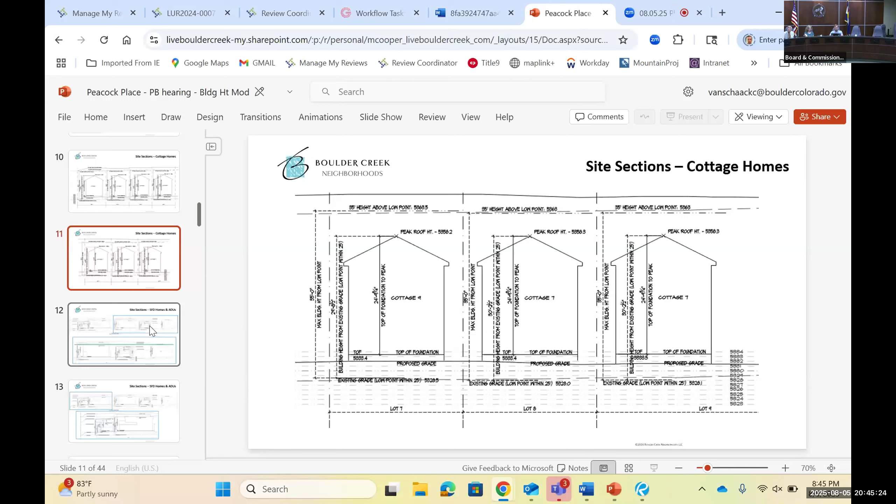So the next 2 slides are through the cross sections of the single family homes and the detached garages with the ADUs. And on the bottom is a blow up of the right side of that top section. There's a bunch of sections, and I just picked one out to kind of show the intent here. On the far right are the existing homes in Greenbelt Meadows. Those homes are about 29 or 30 feet tall.

As you can see, the ADUs in the middle there are well below the heights of those homes. They're still in proportion and much lower than the proposed single-family detached homes. And we're only a few feet above those existing homes in Greenbelt Meadows. We're the same scale and architectural design, traditional roof forms and architectural forms as well.

And this slide is highlighting kind of the worst lot on the accessory dwelling unit. It's kind of hard to see on this one, I can't see the numbers from here, but it just shows the kind of predicament of that corner of the site. You can see the several feet of fill there, and in another slide I'll show you more detail on that.

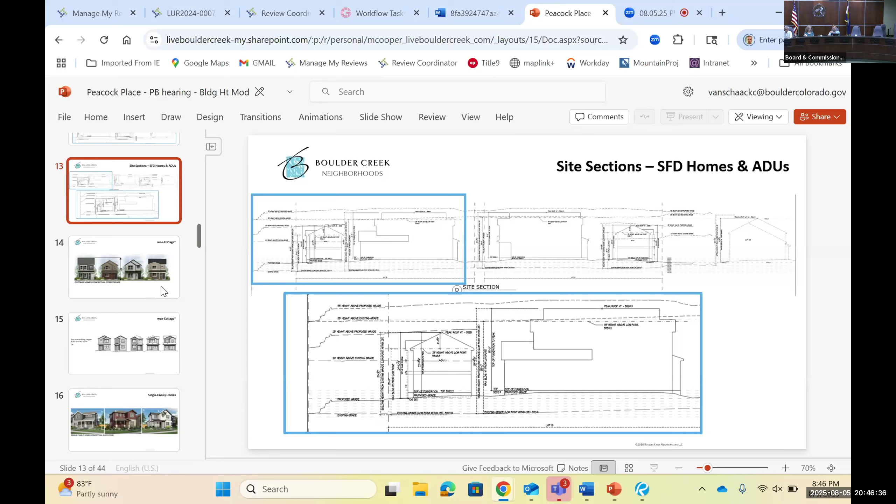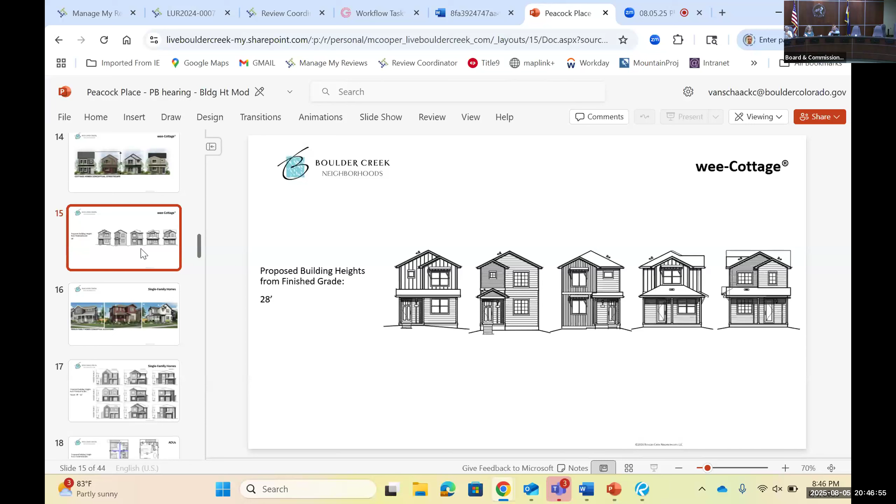This slide just shows what we depicted for architectural character in the design guidelines, showing homes about 28 feet for the cottage homes. And on the next slide, this is kind of the direction that we're taking the styles that we are creating specifically for Peacock Place. And those will also be about 28 feet tall. And in the design guidelines, these were the images presented for the single-family detached homes. They were 31 to 32 feet tall.

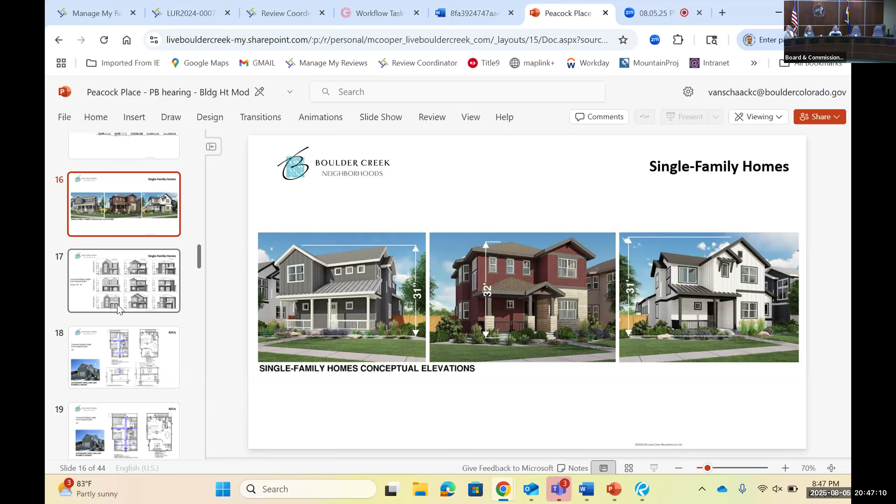And in the next slide is the direction that we're taking for the styles that we want to create for Peacock. And really the key here is we don't want to just design to the lowest roof form. We want to have a variety of architecture here. So having these 3 different floor plans, 3 different styles, we really can create a much greater variety of architectural diversity.

So this is another reason why we want to have a little bit more leeway on the height and not just have to squat all the homes down with 3/12, 4/12 roof pitches. We want to have a variety of roof forms and character. So this is kind of where we've held our architect off in terms of design. And this is what we will likely proceed forward with if we get the approval tonight.

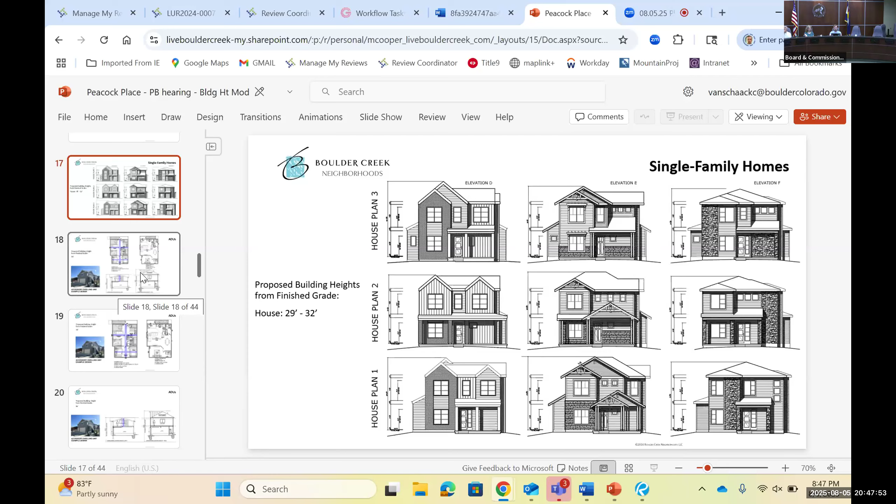And going on to the ADUs. So on the left is the unit that we would be left with if we had to build it at 25 feet from existing grade; this is showing the worst condition lot there, lot 13. And as you can see, there's only about 100 usable square feet down the middle of the structure, the floor plan. It's really not a livable or buildable unit at all. It just doesn't work at all.

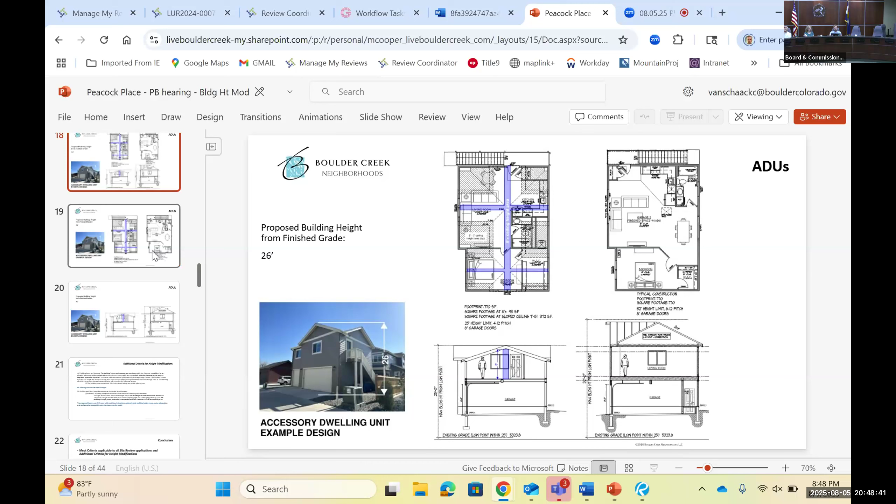We just want to build a typical 25, 26 foot garage with an ADU above, with proper ceiling heights and 6/12 roof forms we are able to accomplish. So it really matches better in character with the homes if we can get this flexibility. And these are just blow-ups of those floor plans, a little more up close. The image on the left is what we showed in the design guidelines for 26 feet.

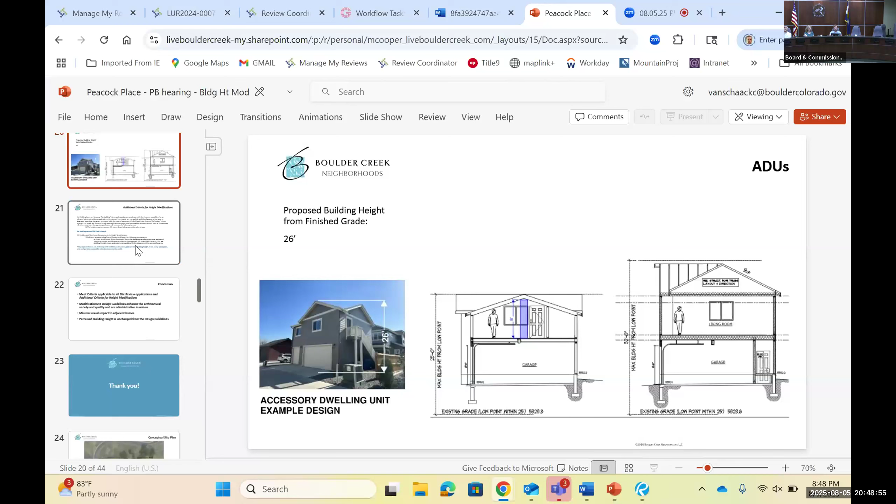We obviously do not exceed 200 feet in length, and we feel that the proposed homes are all 2-story with traditional elevations, pitched roofs, building height, mass, scale, orientation, and configuration compatible with the homes to the south in Greenbelt Meadows. So we feel we're meeting those criteria.